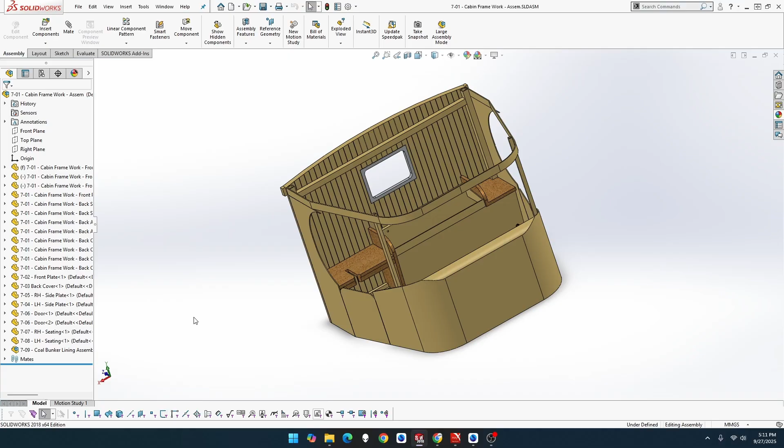Let's go File, New, part of MMGS. Alright, so technically this is made up of about eight pieces, probably 1, 2, 3, 4, 5, 6, 7, 8. But I'm just going to do it as one piece. So we go to top plane, sketch.

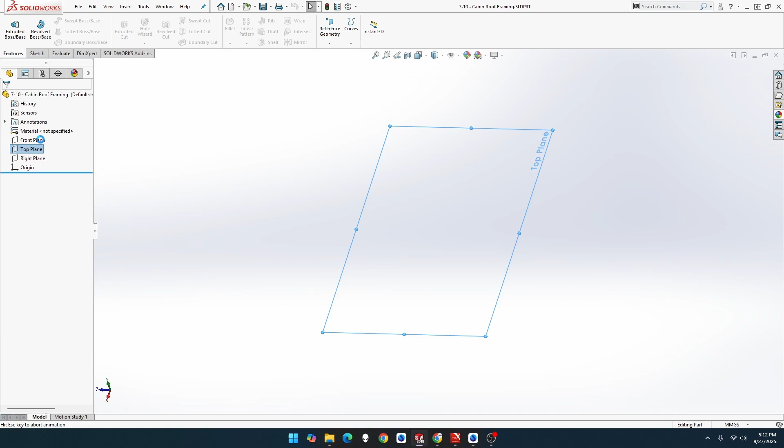So we're going to do a box there. Oh, that's a terrible one. Should have done it that way.

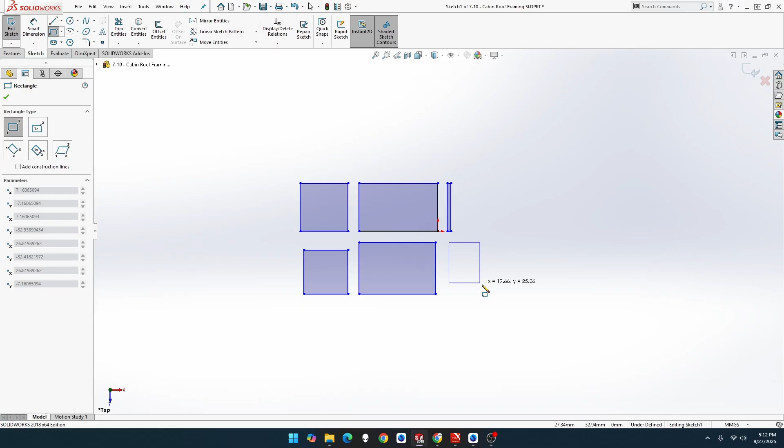Let me just pop these out, some of these have got to be altered. I'm just putting roughly in what it's going to be. It's going to be another one there, another one there, and another one there. It's got to be curves and all that, so let's just start this one first.

Oh, hold on. Smart dimension. I wonder why I did that. Okay, so let's do this one first. It's going to be...

Let's see, 26. It's going to be 289 minus 10 minus 10, so 269.

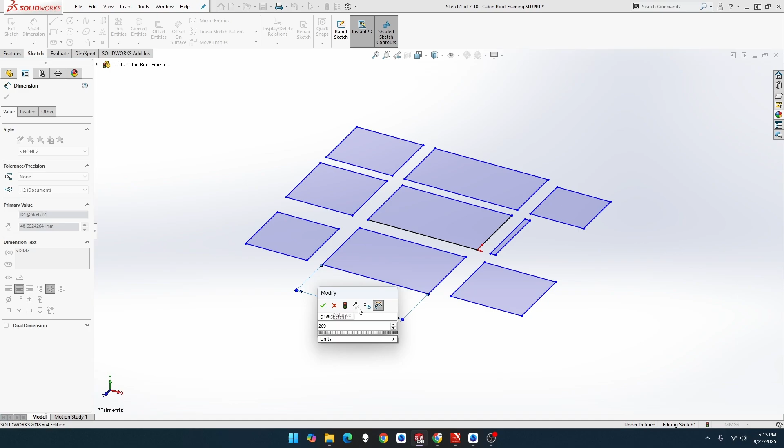Then this one and this one will be 10, like this one will be 10. And then this line here and this line here will be equal. Now, before you go any further, let me do this point, and this point will be horizontal. So it's all there.

And these will be 2. Let me just lock these in, that way that's done. There we go. And that's going to be 225.

225. Let me just move them up a bit. Grab you. Why'd that move?

Let me delete that one. There we go. For some reason it's locked in. That one, and that one. There we go.

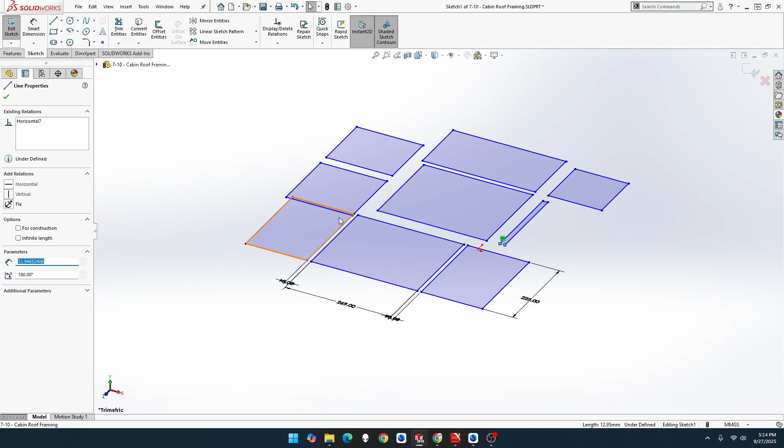Now we want dimension from this point to this point, will be 668. That's why I did those two equal, that way it stays. I didn't have to worry about trying to work out the measurement and that. Let me just tidy this up a bit. There we go. A bit there. So that's kind of locked in.

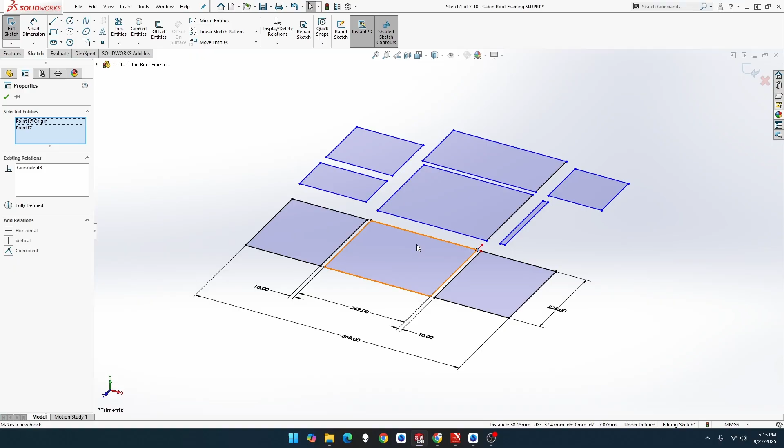Now this point and this point will be vertical. Oh, it's not locked in. Let me just lock that one in. There we go. That way, see, that is fully defined. It's all black there. Now that's cool.

So this goes sideways. These 3 points will be horizontal. Perfect. Now we want to go to measurement again.

This is going to be, let's probably do... let me just create these as, a lot of these will be cut out, but I just want to lock these in. Those 3, this one, and that one. Very cool.

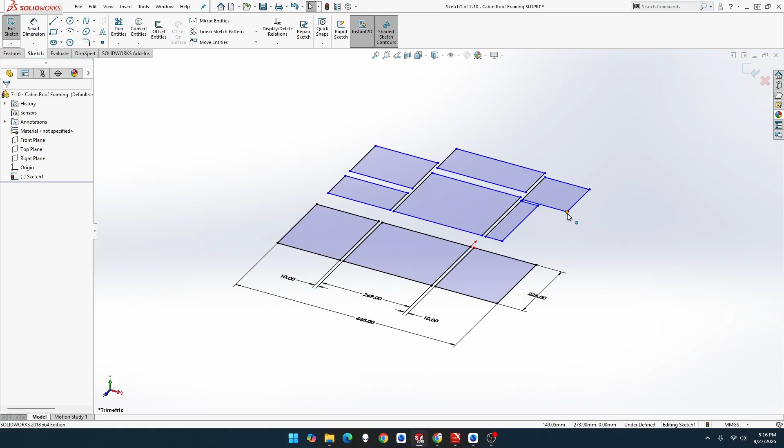But that one's not in the way, so it's not overlapping those three. There's so many ways you can do this. Oop, I zoomed out accidentally a bit. That point, and that point. There we go.

Now we want... let me move that one up, move that one up. Let me just lock these in. There you go. And lock these three in

as horizontal. This one, and that one as horizontal. There we go. Now these can move that way, but they can't move sideways. Same with this.

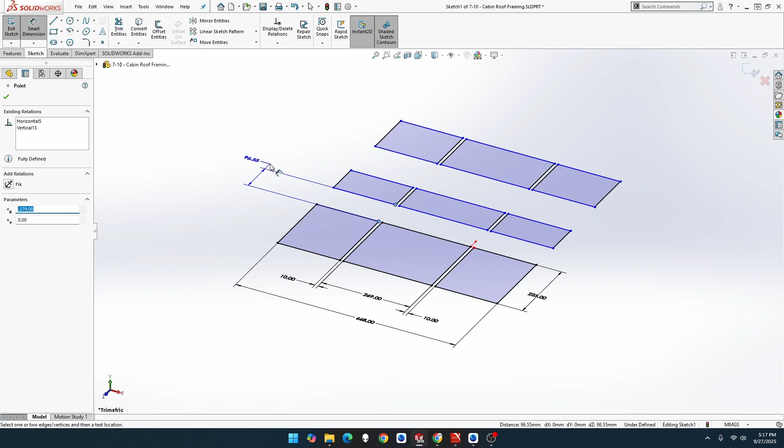Now, I'm going to do this point to this point, just in case I delete that one. It's going to be 10, along with these two are going to be 10. Actually, let me do that line. That's fine.

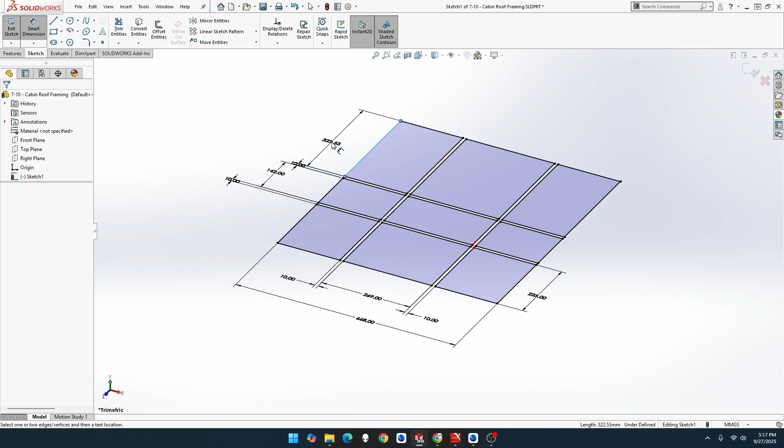There we go. Now, the width of this one is 142, and this one is 130. So from here to there, 289. Beautiful. Yep. Just want to make sure.

Okay, let's go back. Let's just exit out of that for a moment because I need to go back to normal. Thank you. Now we go back and sketch.

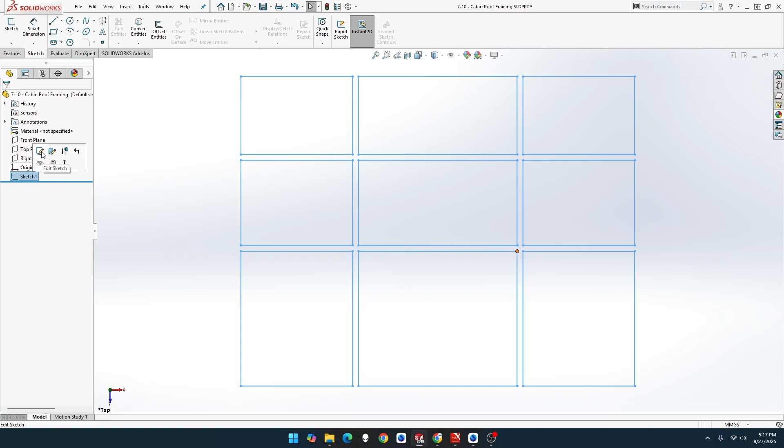Now it's gone, line's going to go up there, curve is going to be on the same, the other side. So some of this I won't delete, I will transfer it into construction lines. So let's do a line.

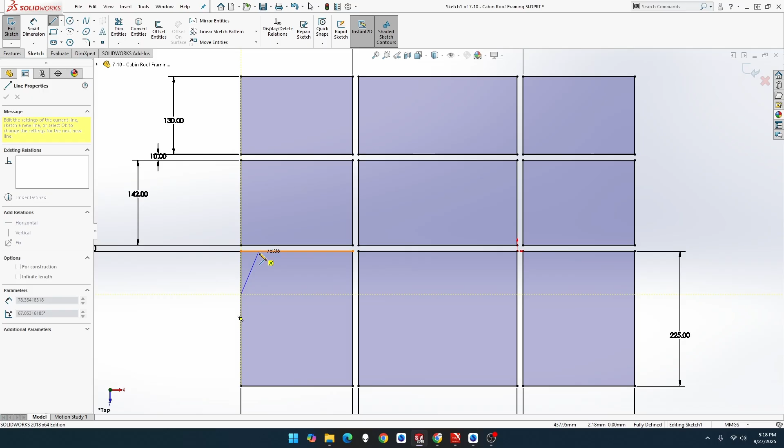It's going to go from here to there, that's going to be curved to... oh, hold on. Before we do anything else, let me just delete that one. There's something I've got to add. We got another box from there to there.

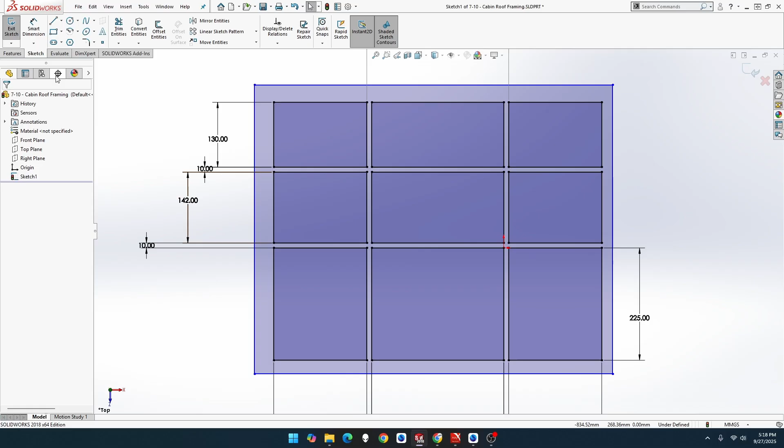Oh, this 668 should actually be 648, because 668 is from the outer edge to the outer edge. When it's 10 and 10, it's going to knock back 10 each, so it's going to be 20. So that's correct.

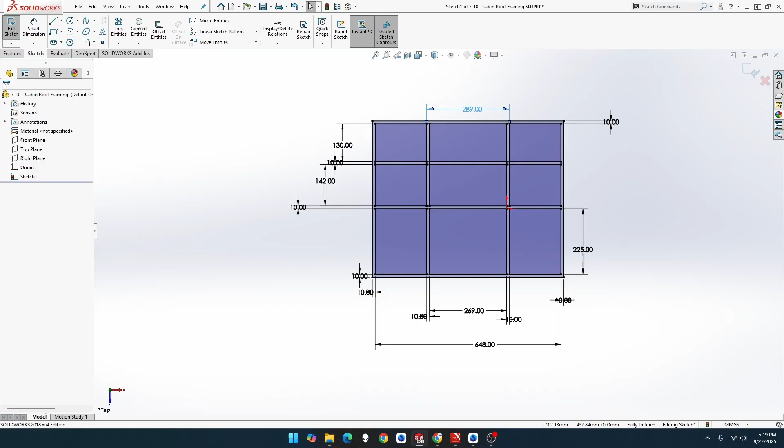These two will be 10. There we go. Bring that down a bit. Bring that up a bit. I just want you to have it so it's not so far out. I can bring that up and zoom right in. There we go, and zoom it. Oh, always go the wrong way. There we go. Okay, now we go to line.

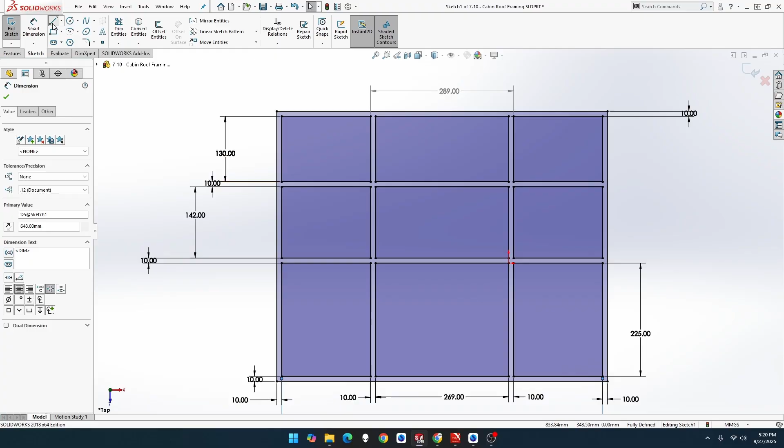It's going to be out here to there. Touch that, it's going to be curved. It's going to be to there. So that point and that line will be joined.

So that's good, that's good. Let's see, 152. Smart Dimension. Probably end up actually cutting a lot of these, I'll probably end up having to redo these measurements. Oh wow, that's not far off. 152.

And that's going to be a radius. I'm probably doing this point here, because this point can technically be moved. Yep. So this line will be, oh, this point and this point will be horizontal. There we go. And that dimension will be 102.5 radius. 102.5.

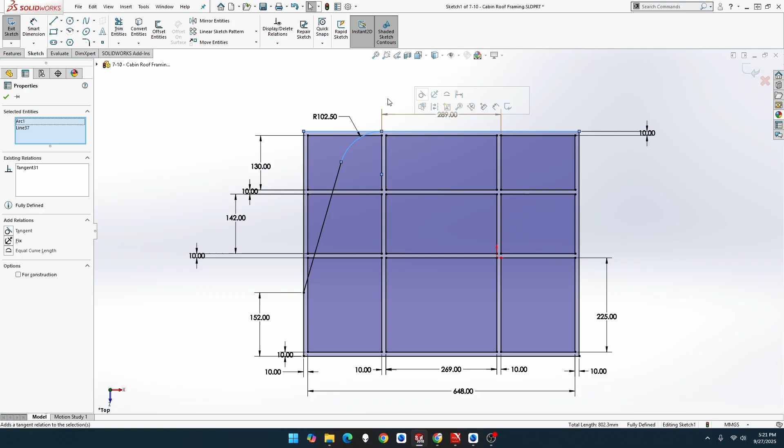That curve and that line will be tangent. There you go, it's locked in place. Beautiful. And that's going to be 10 across there as well.

So now if I do a trim on that, what happens? Yep, that's locked in. Okay. So if I do a trim on those ones, and that one, that one. That's cool, no, that's fine. That's no big deal. Could have done this half the mirror as well.

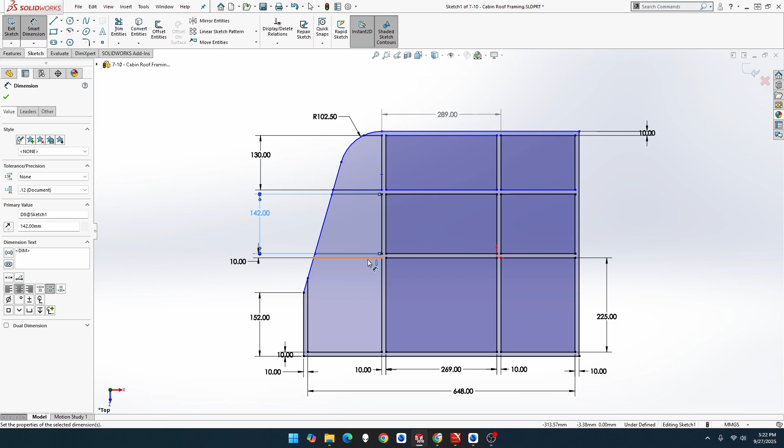Okay, so let's just do 130, lock that one in. 142, lock that one in. That line, already done that line. That line and that line. There you go, everything's locked back in again. Beautiful.

All right, so this line here is going to go from there to there. Tangent arc, it's going to go right there. Now this line and this line. Oh no, sorry, dimension, I probably do actually, hold on. This one and this one will be parallel.

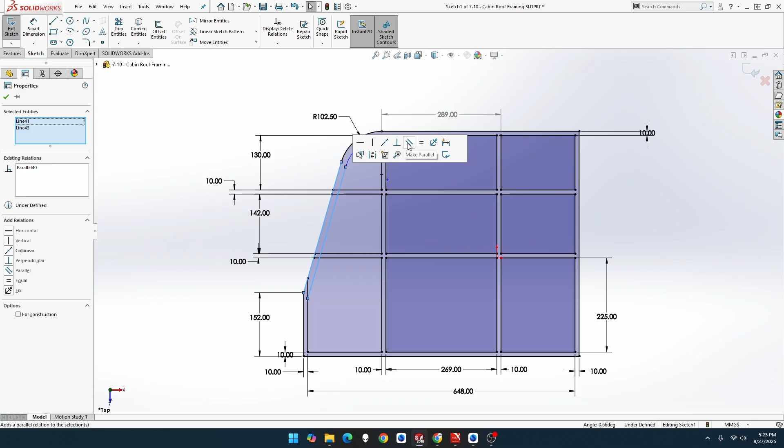Let's not do it just yet. Let's do these two as parallel. There we go. And then this point will be 10.

Let me do a trim down here without taking out anything important. No, I've got to zoom in. There we go. That one, that one, that one. And that one, that one. And that one, there we go.

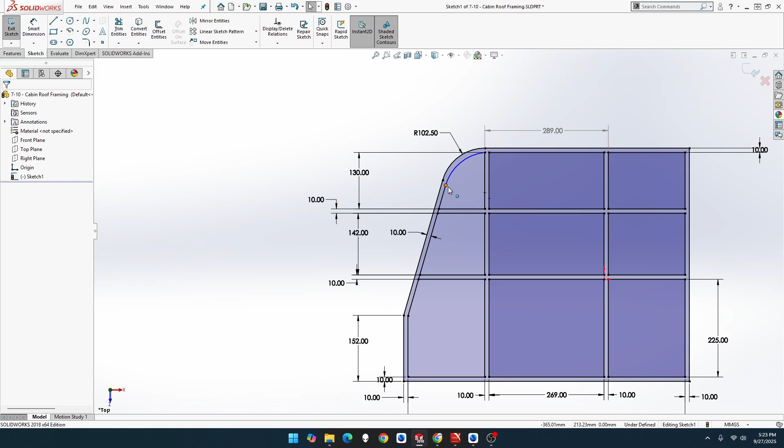So if we do that line to that line, 10. There we go, locked in, beautiful.

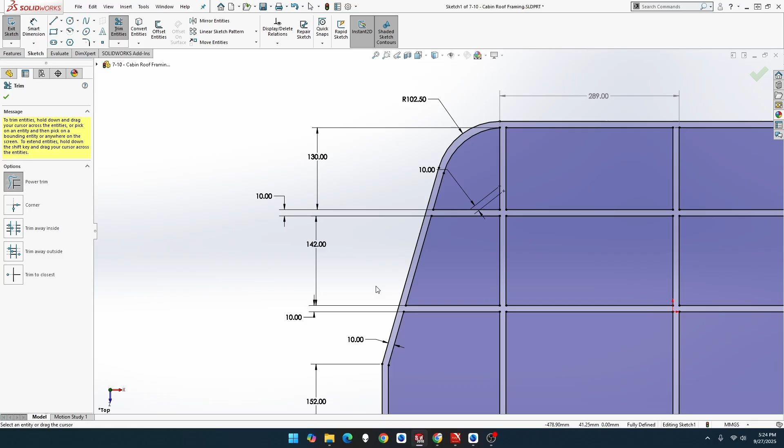I just saw another thing I need to trim. Trim that one and trim that one. Now for some reason it put 2 points there, but it works out the same. Oh, not trim, yeah, it puts it down there for some reason. I don't know what it did. But that's pretty much good. I just need to do the same on the other side now.

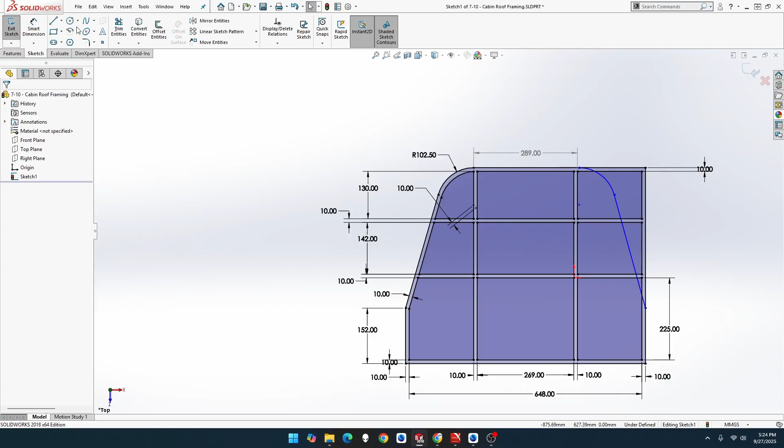So grab the line tool, start outside to about there, go up, tangent arc, and it's going to go right there. Let me do another line from this one up, curve, there we go, to there.

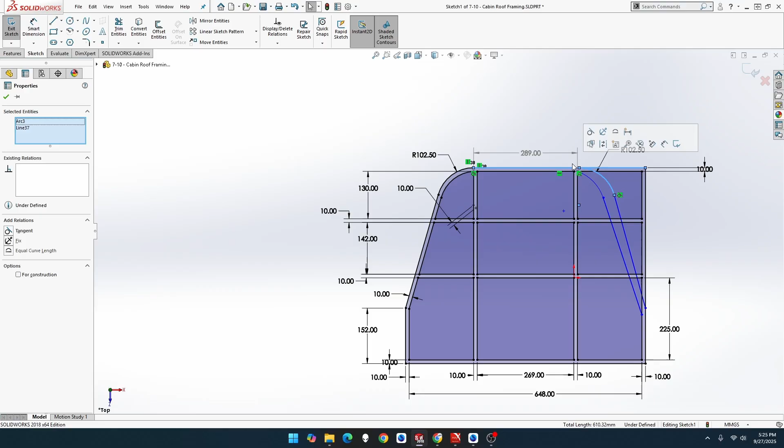Smart dimension. This is going to be 102.5, 102.5. This curve and this line will be tangent. Okay, this point and this point will be horizontal.

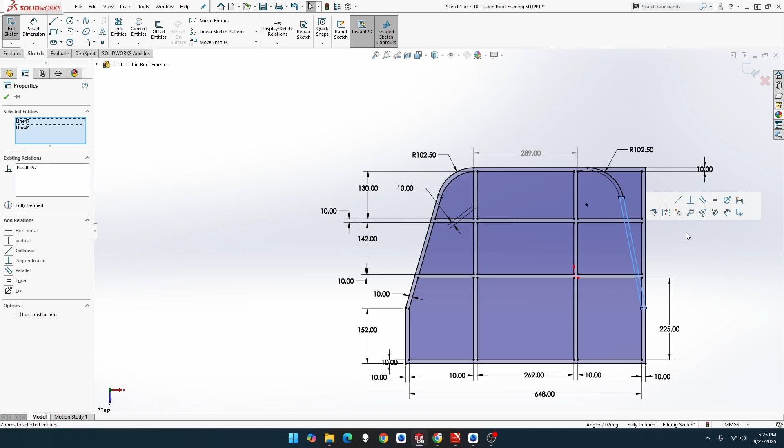Along with this point and this point will be horizontal. This point and this point will be horizontal. Along with this point and this point will be horizontal as well. There you go, that's locked that one in. Now, actually, I'll put these two as parallel, and that's locked it in. Nice.

Let's do a trim. Oh hold on, see this one's out, so we might do a measurement on that one. Actually no, we'll do that line and this line and put a tangent. There you go. Nope, did not fix it.

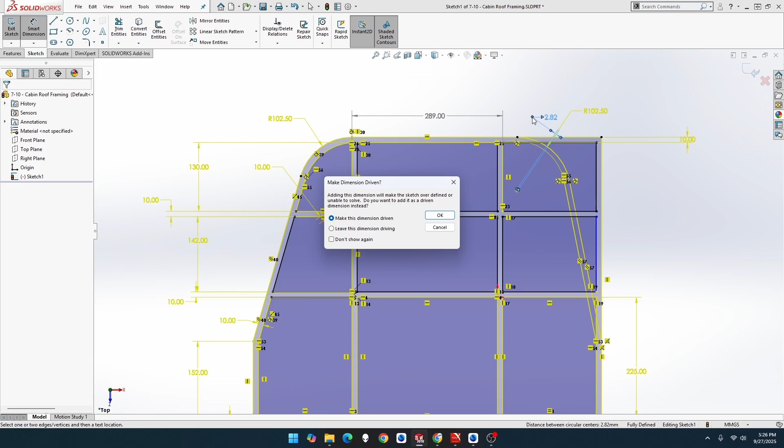Let's do a measurement there. Oh, that's weird, that one to that one. Okay, let me get a measurement. Thank you. That line and this curve, will that do tangent? It did, but then it broke. Why? Let me just delete that line for a minute.

Actually no, hold on, let me go back. Can I make those two equal? Oh, something breaks. Let me just delete that. Actually, I'll get that one. Yep. Okay, let me try that again.

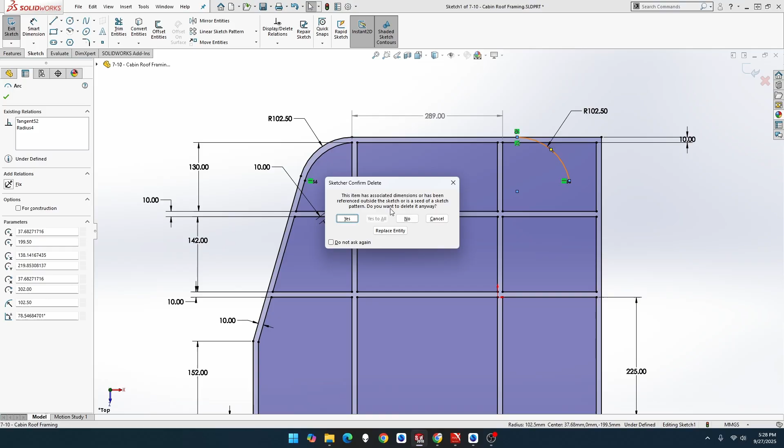Okay, for some reason it's there instead of there. Why is that? Let me just delete those two. Delete that one, let me just do that again. Yes, delete, thank you. Okay, let me just try that again. Somehow I've got a lock somewhere that screwed something up. Let me do, nope, curve. Thank you.

Okay, that point and that point's going to be vertical. That line and that line will be tangent. There we go. This point and this outer point should be vertical - oh sorry, horizontal. This point and this point should be horizontal. That should lock it, technically. There you go, that's better.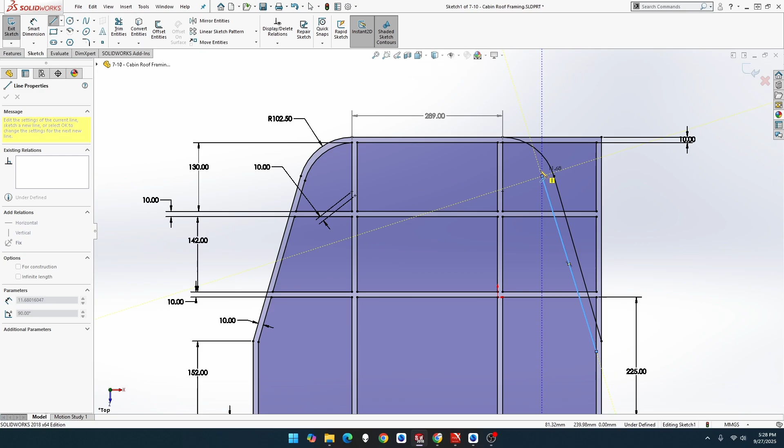Now, if we do another line from here to there, touch again, do an arc to there. Now, these two lines should be parallel. That should be 102.5. This. Cool.

That point and this point should be horizontal. Lock that line in. This point and this point should be horizontal. There you go, that should be good now. Do a trim. Do through there.

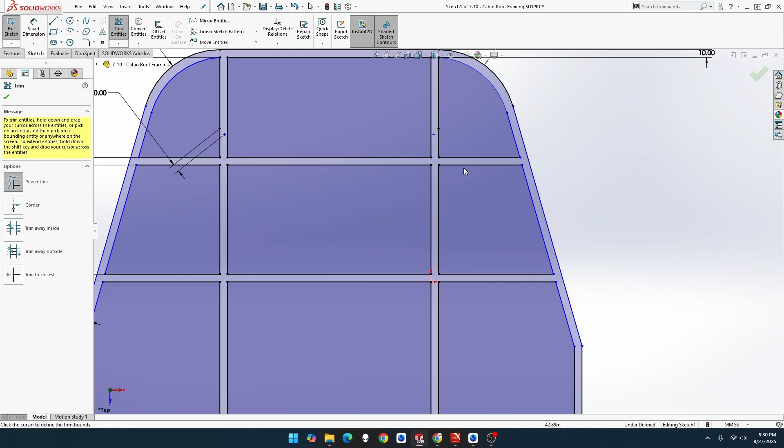I'll do a couple more measurements again, just lock it all back in. There. And there. Let's zoom out. Okay, so let's do some more measurements again. That one will be 10. Okay, what's not moving?

What's not? It's underdefined. What's underdefined? What did I cut out, or shouldn't I cut out? Let's go smart dimension, top to bottom. Okay, that's not going to help. That's not going to help.

Actually, there's a way you can add measurements in - see, insert tools, there's a way you can tell it to put dimensions in, fully defined sketch. Nope, doesn't do anything. Oh, hold on, when do you click? Okay, no solution found. Interesting.

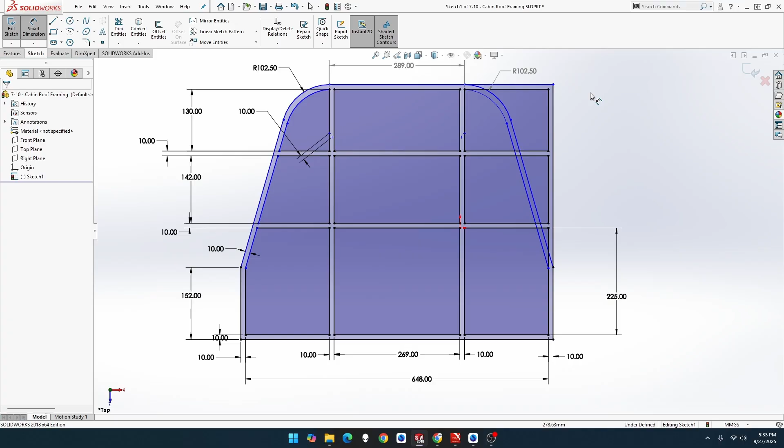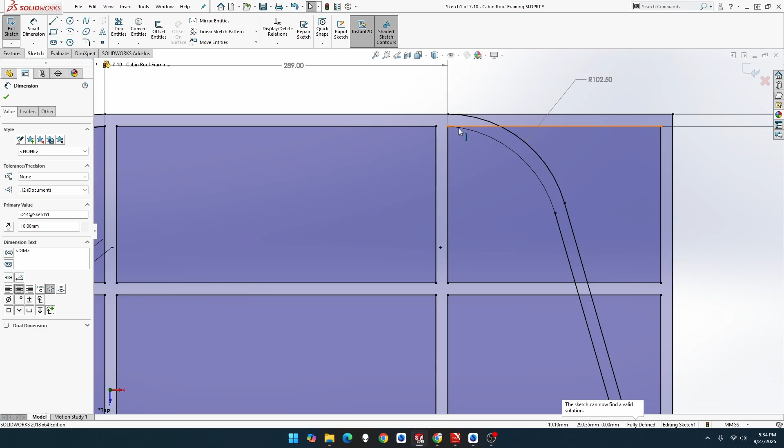Come on, thank you, let me do that again. It's going to be from this point to that point, which is staying there. Okay, fully defined. Hold on. That is in the wrong spot. That's better.

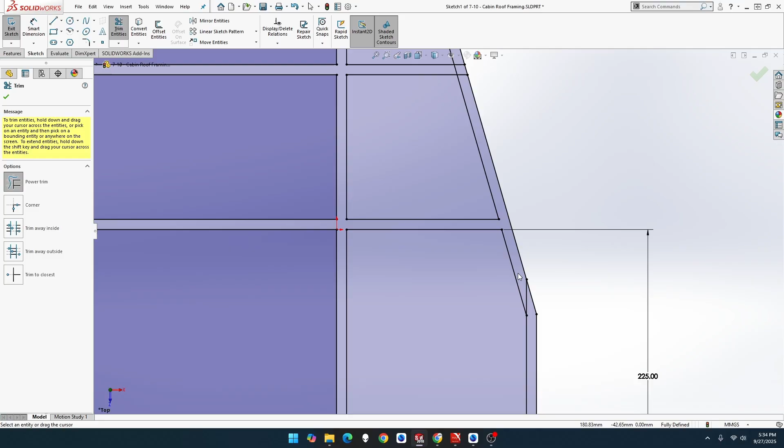Let's try this again, let's go to trim. Take out them. That one. Oh, hold on. Why'd that take that out? That's weird, unless I hit the wrong spot. Oh, there we go, I must have went over it accidentally. Yeah, something to do with that measurement there was screwing up, I believe. There you go.

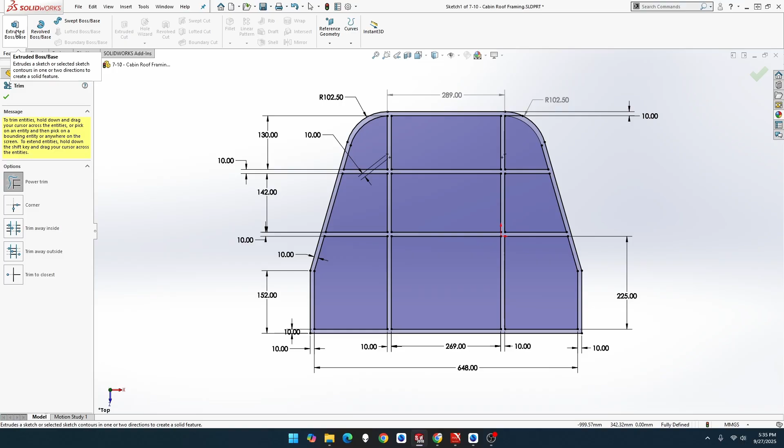Okay, so that looks good. It's fully defined now - there was something to do with that measurement. Everything's in one piece, we now want to go feature, extrude. It's going to be a thickness of 26, and because we've got so many places we can pick, we want to pick that one. Okay, there we go. Oh, there's most of the frame done, not quite done yet.

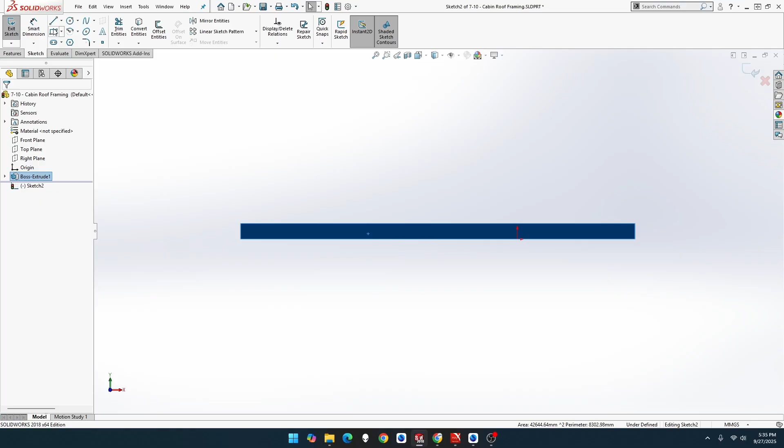So we want to go this one here, the backboard, go normal to sketch. Now we want to add in, we want a line from that point to that point. That's going to curve all the way there. That's going to be a dimension of - actually before we do, we're going to put a construction line across. Put that across there, that's going to be horizontal. Thank you. And that one will be tangent. Beautiful.

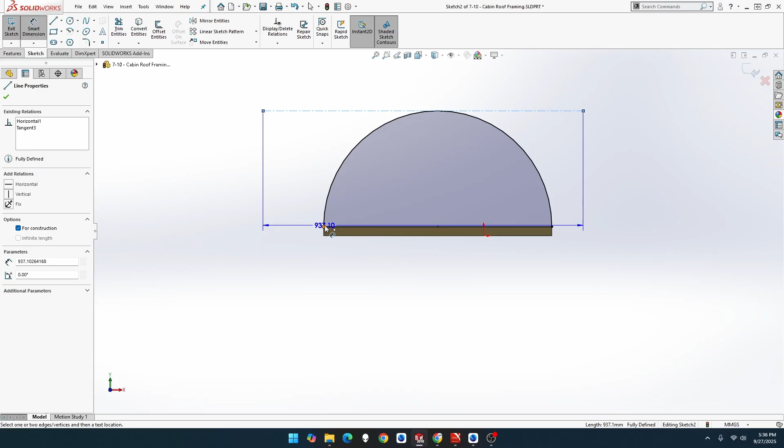Now we want this line to this point will be 54.6. Oh, hold on.

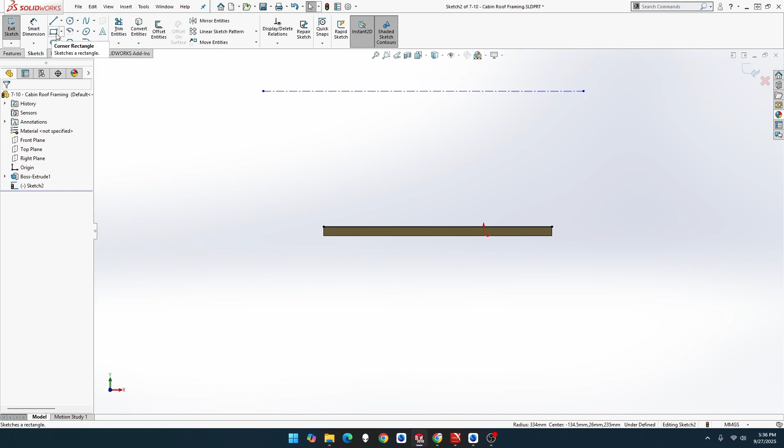Oh, let me just delete that one for a moment because it got locked in - I didn't want it locked in. Let me just go from round, thank you, to there. Those two points. Hold on. Oh good, I didn't want them locked in. Those two points will be that one, and that one will be tangent.

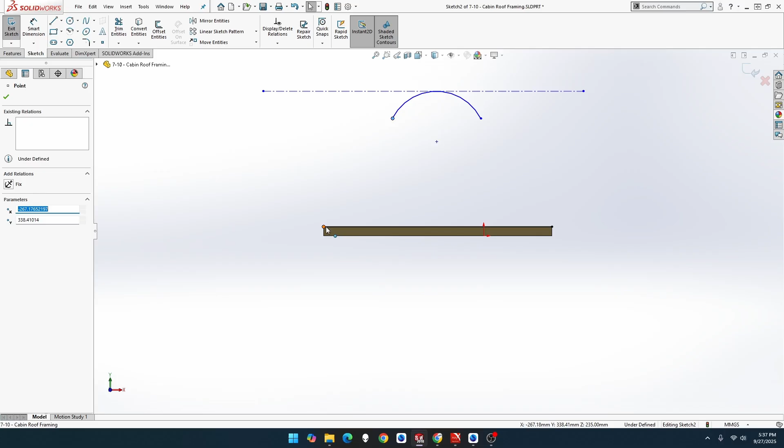That point and that point will be, nope - that point and that point will be locked. Now let me - I haven't locked the other one. Yeah, I know that, but let me just do this measurement here before I lose it. 1966.

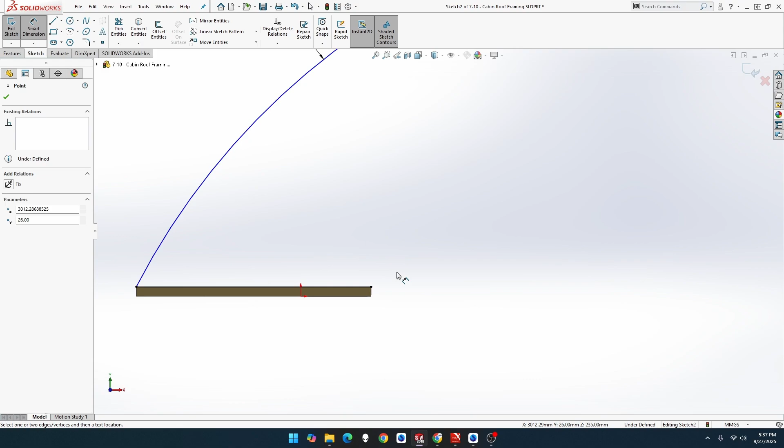Now we want this point to this point. Oops, sorry. Oh, before I do - no, let's do this measurement first. Sorry, my bad. That one to that line will be 54.6.

Now we want this point and this point. Yeah, the measurement, thank you. This point and this point. I hope that joins. It did not join - why?

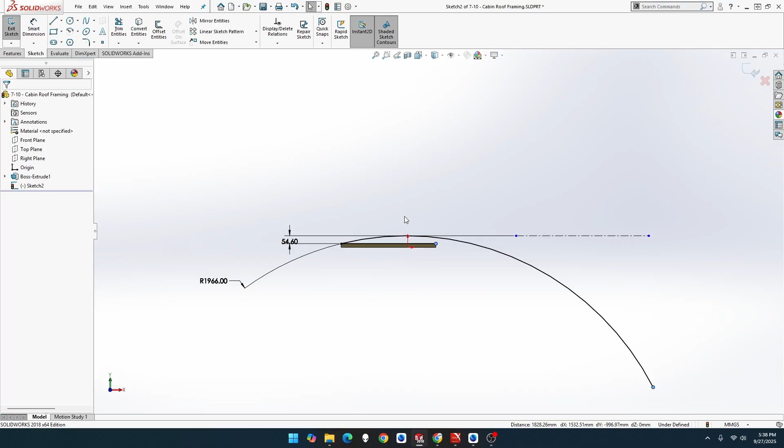Interesting. Let me just delete that one for a moment. I can highlight it without picking it. There we go. Okay, now let me try this again. This one and this one join.

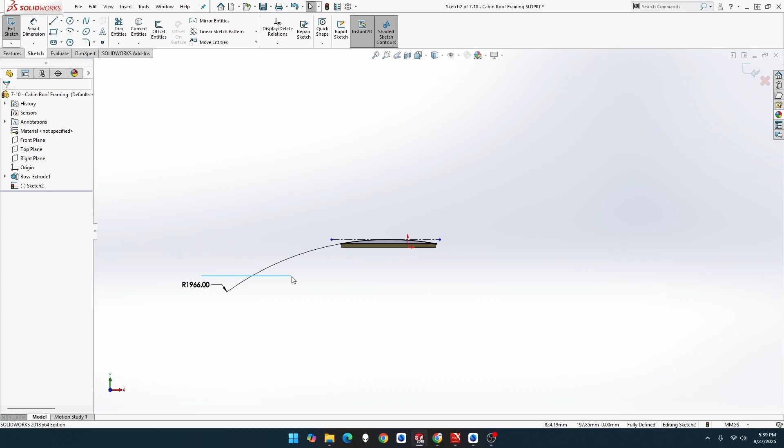Just move that across. There we go. And that can go... that can go right there.

Now, what is the measurement of this one to that one? Nope, in one angle. Hold on. Yeah, that should be vertical. That line, that point should be vertical. Now what's the dimension? Because it kept on giving me angle, and angle means they're not normally parallel. We do that one, to that one.

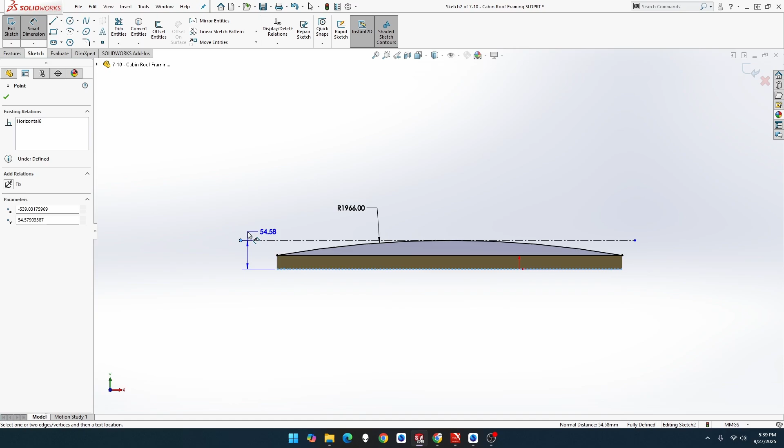54.58. Yeah, a little bit out. Could have been 54.6, but that's good. Okay, that's fine. Okay, well, that is through by 10. But make sure it's going the right way, which is going the wrong way. Thought it would. Flip it back and done. There we go. That is that piece done.

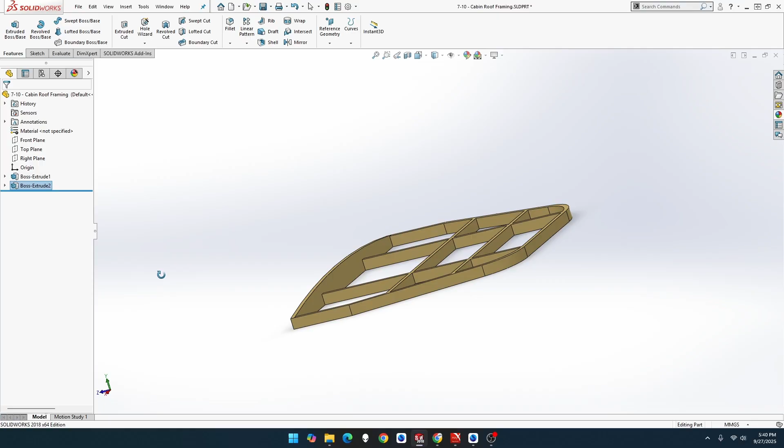It's got a nice angle for it. Oop, lost my cursor. There we go, zoom in. So there's no holes in it. There's no that. Nope, that's all there is. All right, so let me head over the other piece.

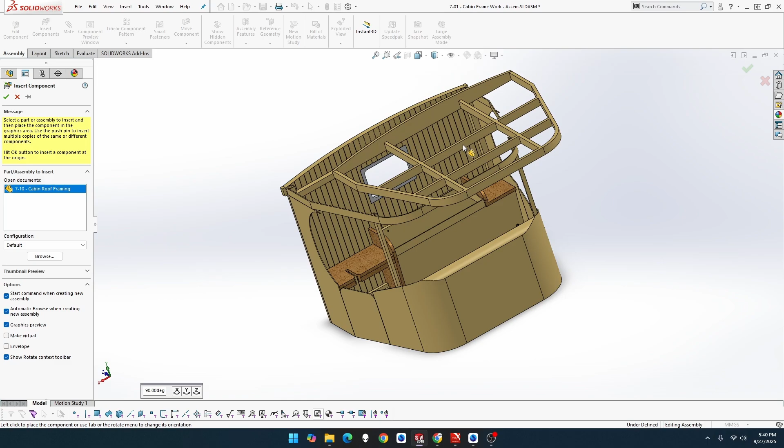Let's now load that one in. Oh, it's the right way, that makes it easier. And that's going to be on top of here. So if we go mate... no, it's not. No, it should be. Should be in there because it's got to match that one. So let's see what it does.

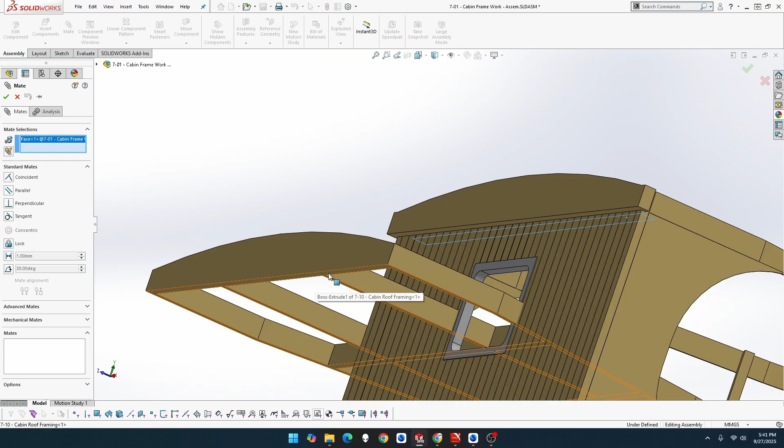There we go. Come on. Okay, thank you. Okay, so let's drag this across. Yes, we turn that up.

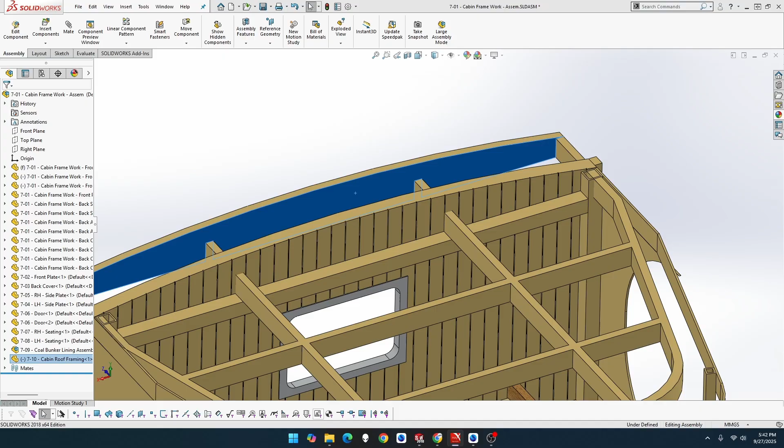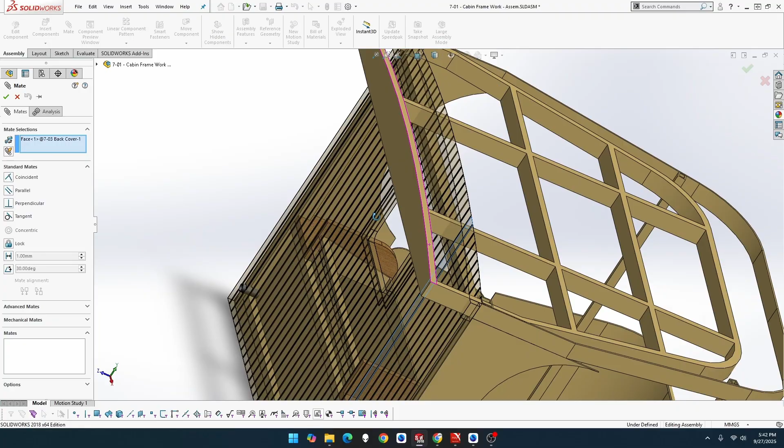Okay, let's just try something. Let me put, actually, nope. Let me put that face to that face. Oh, mate would help. That one, thank you. Let me move, let me move you across. Let me grab you. What happens on mate? There.

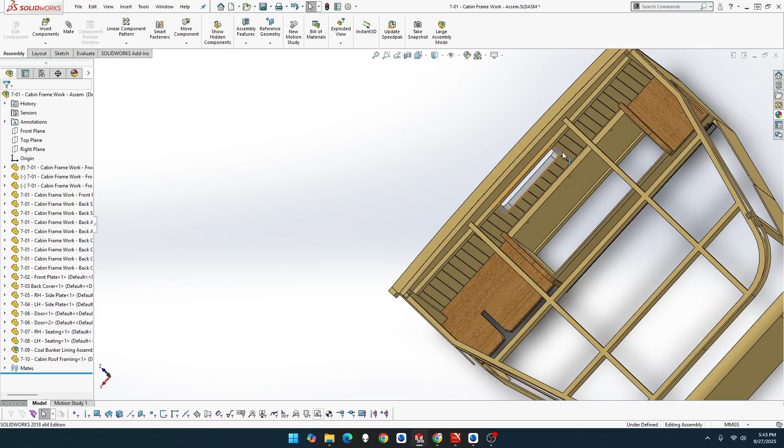That's fitting perfect except for the upper support. It does. It does kind of.

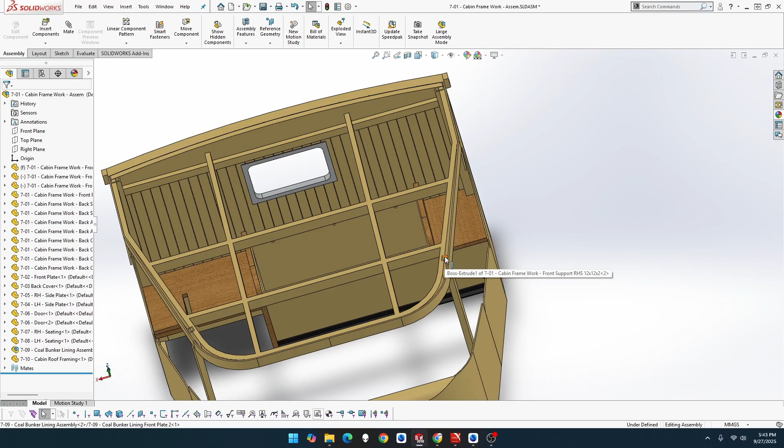Now, should these be... It shows no cutouts in there. The assembly doesn't really show together yet, so we've got this one here. We've got this piece still got to do here, which I presume I thought goes around there. Because that sits on top, it doesn't make sense.

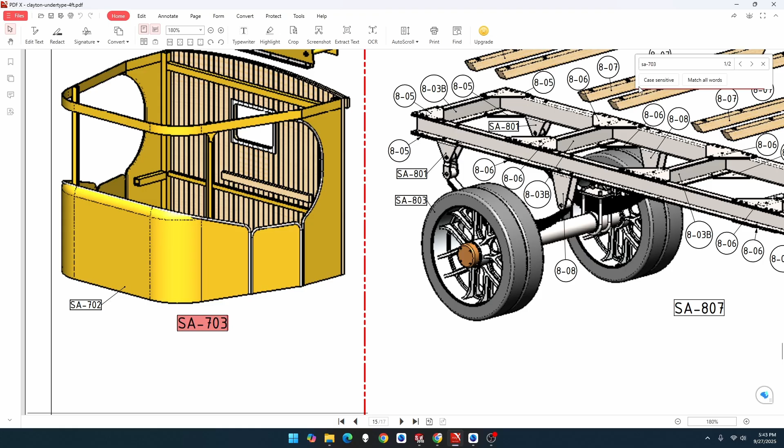Let's have a look at SA-703. Go next one, thank you. Yeah, okay, this piece is round there, so that goes there. So it's got to sit inside.

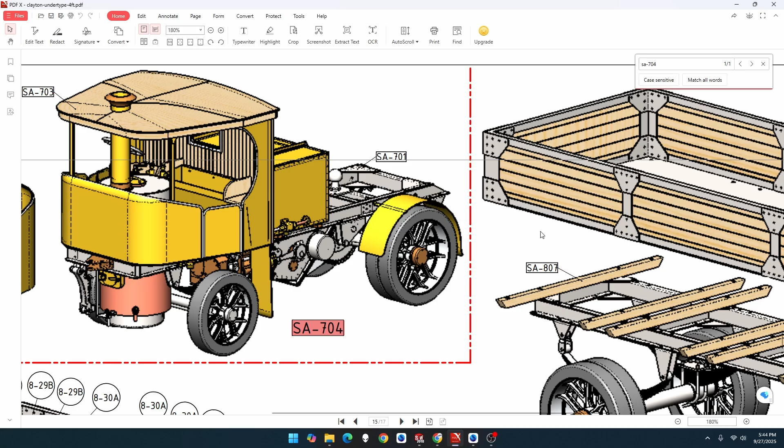Where's 4? Do we have another angle of that? I guess it's one piece. It's like, don't have any angle parts on the back, I don't think. Yeah, there's nothing there. Nothing shows the back of the truck. Let me go right to the top.

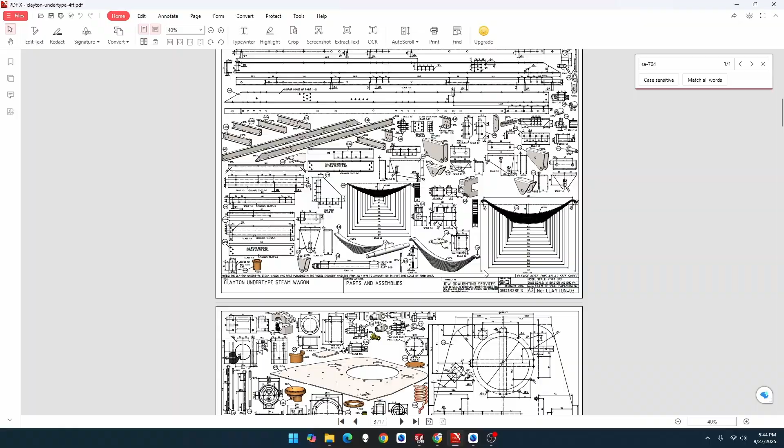There's a lot of pieces. There's a lot of stuff going mechanical. See, it shows there. Oh, wrong way. Oh boy. There we go.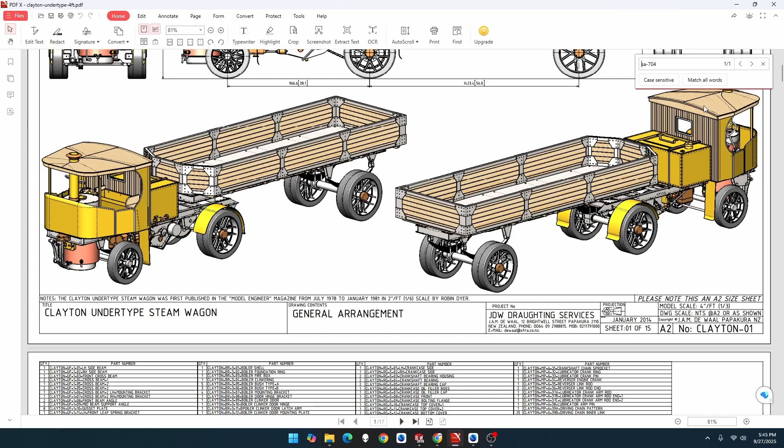Oh, this back's part. Yes, it shows it there. So that means that piece I've still got to build on the outside, the other piece on the inside.

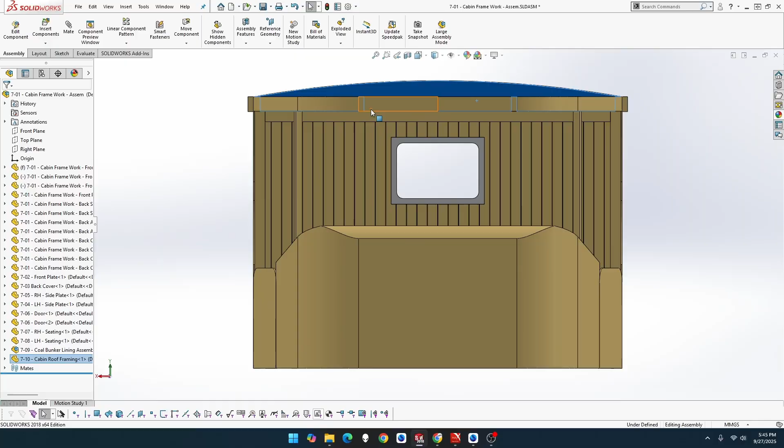Okay, let me just put that back there. Let me have a look at something. Let me go to normal. Let me go through. So it lines up beautifully there.

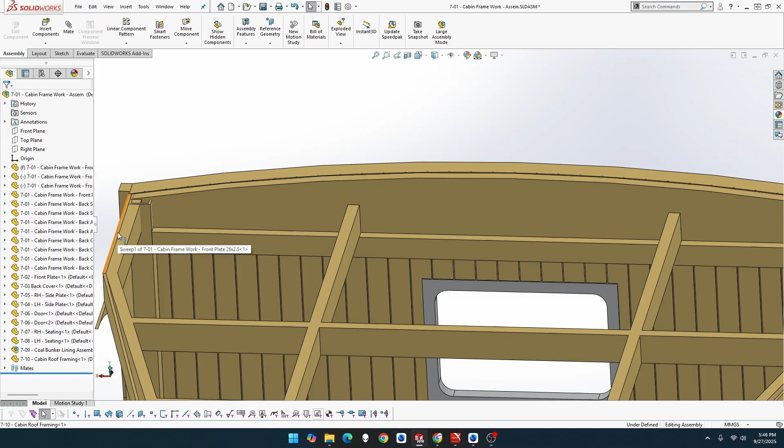So I'm thinking, not going to do it right now, but the only thing is you get rid of them, it holds it there. Ooh. Yeah, something's not quite right there. I've got to work on something on that. Because you can't cut that piece off and put it on, because that's actually holding that part there together.

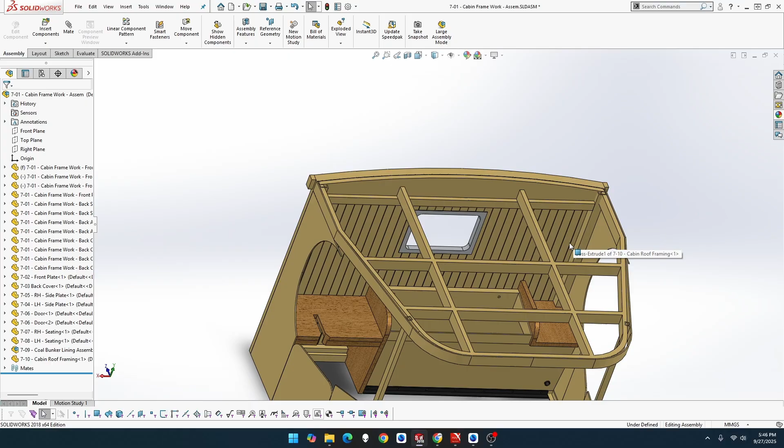Interesting. Okay, I'm going to leave that for now. But let me know in the comments below what you think, any ideas you may have to fix that.

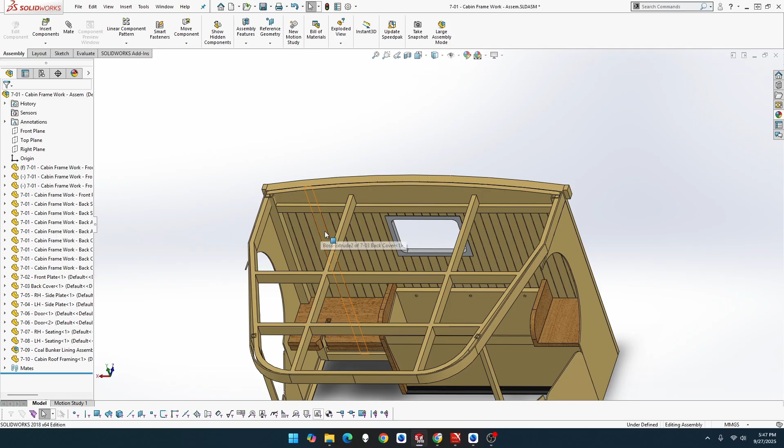You always cut a piece out. We always cut a piece out for that there and bring a piece around. Like cut a piece out there for the square tubing and bring a piece around there, and again there for the square tubing to go through, like here. So cut a piece out so it slides in the square tubing. So you could do it that, and then bring a piece around there, and then that piece cut out. So that's what I'm planning on doing, but I won't do that just now. We'll leave it for now. That'll be when we start doing alterations to adjust the vehicle.